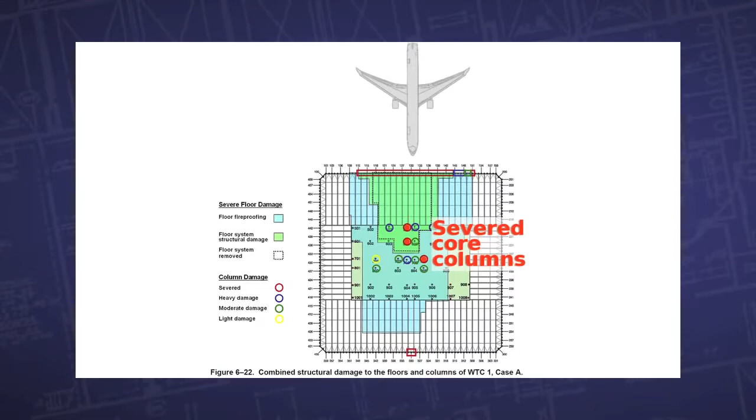Several columns were severed, and the jet fuel ignited fires that spread over several floors. About an hour later, millions watched in shock as both towers were suddenly and rapidly destroyed, killing almost 3,000 people, for whom truth and justice may have yet to be served.

Hi, I'm Richard Gage, AIA, licensed architect of over 20 years and member of the American Institute of Architects. I'm founder of Architects and Engineers for 9/11 Truth, a nonprofit organization of well over 1,000 technical and building professionals.

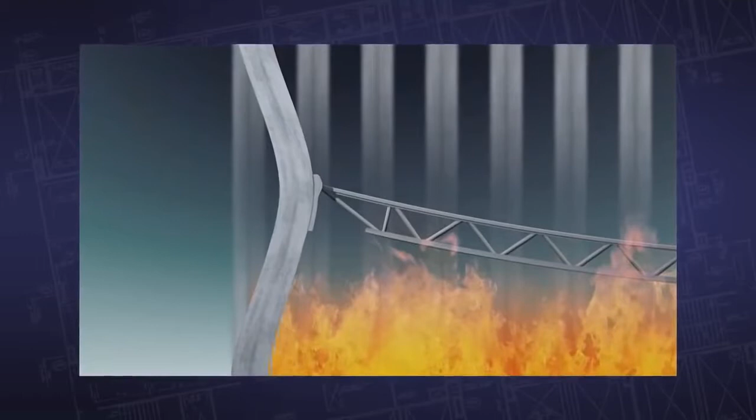According to official government reports, the fires weakened the structural steel framing of both twin towers, leading to sudden, progressive, and total collapses.

Unknown to most people, a third steel frame high-rise, World Trade Center 7, was also destroyed. Critical questions have been raised by more than 1,500 architects and engineers about the official explanations for the destruction of all 3 of these buildings.

Along with more than 10,000 other concerned individuals, these professionals, collectively comprising more than 25,000 years of experience, have signed our petition. They're calling for a new investigation into the destruction of these 3 World Trade Center high-rises.

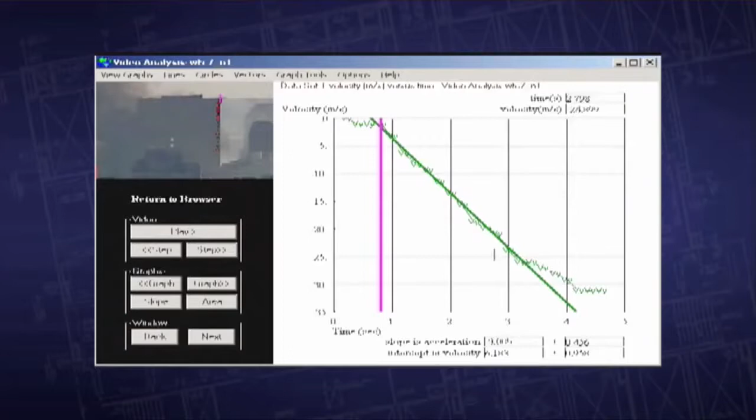This call is based on evidence that reveals a very different destruction scenario than reported by government engineers. As coherent sets of scientific facts are brought into focus by the experts, the data, and the witnesses in this film, you'll come to a much greater understanding of the events of 9/11 and will be in a position to draw your own informed conclusions.

The new World Trade Center Building 7 looms above the site of its original. Building 7 was a 47-story high-rise, not hit by an airplane. Yet it was the 3rd modern steel frame skyscraper to collapse rapidly and symmetrically on 9/11.

It was a football field away from the North Tower and sustained minor damage from falling debris. Building 7's precipitous collapse was blamed on normal office fires.

I'm Steve Barish, founder and president of Barish Architects and Associates, Inc., a 33-year-old architecture, planning, and engineering firm. One of the things that really interested me is how quickly the Tower 7 fell. It fell within 7 seconds approximately from top to bottom.

This building was built in the mid-'80s and met all the codes at the time. From about 1965 until about 1985, most of my experience has been in high-rise, multi-story steel buildings.

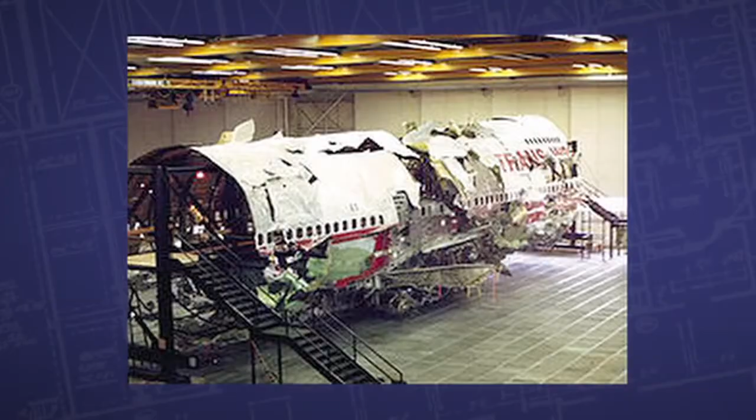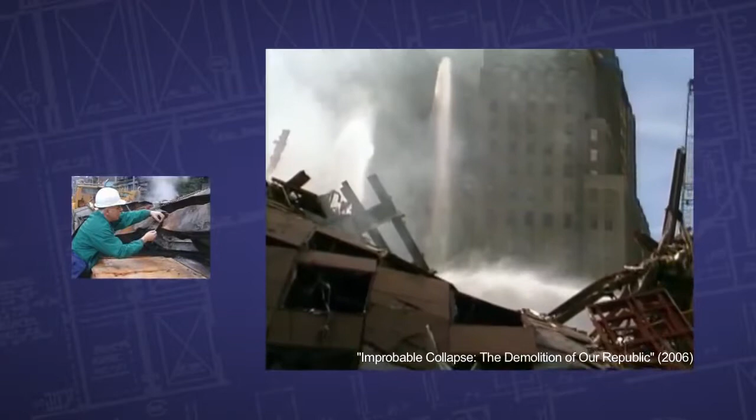Normally, when you have a structural failure, you carefully go through the debris field, looking at each item, photographing every beam as it collapsed and every column where it is in the ground, and you pick them up very carefully and you look at each element.

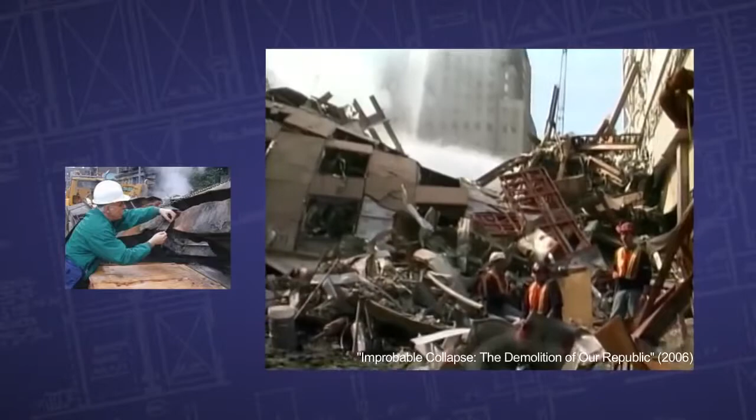We were unable to do that in the case of Tower 7. You can't do science when you are deprived of the evidence and when your hypothesis is the least valid instead of the most likely - when the most likely hypothesis in the case of Building 7 wasn't even mentioned. This is not science. It's trying to prove preconceived ideas.

Was a proper investigation performed that might have revealed the use of accelerants or explosives in World Trade Center 7's destruction? NIST concedes that they found no evidence for explosives. So then we asked them, well, did you look? And they said, no, we did not look for explosives or residues of explosives.

Big explosion. Blew us back into the 8th floor. I'm okay, all right? Here, hold on. You want to call your mother or something?

Just the fact that there were explosions means they need to be investigated.

Keep your eye on that building it'll be coming down. The building is about to blow up. Moving back. We are looking back. There's a building about to blow up.

We don't have the real story on what happened because there wasn't a proper investigation done.

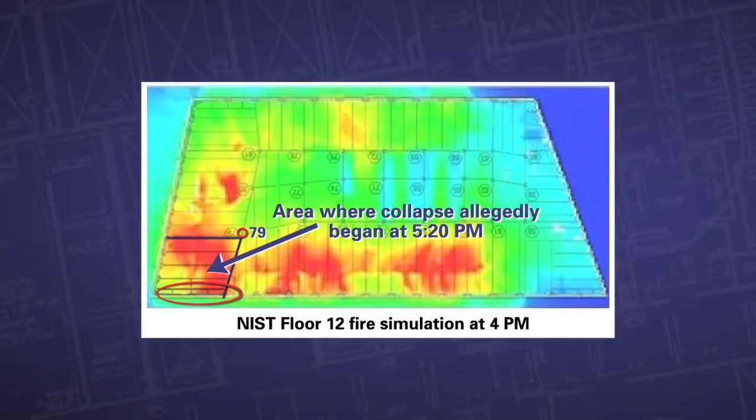This claims the fires were very large, very hot, and long-lasting, when in reality, observation, which has been researched by many people, shows these fires did not last very long. They were not in the locations where NIST claims they were at given times.

I'm a fellow of the American Institute of Architects. For the 40-plus years that I've been practicing architecture, I have designed a variety of buildings from small houses to high-rise office buildings. Some of the high-rises that I've worked on are 1 Shell and 2 Shell here in Houston. I was project manager for a 22-story office building in Akron, Ohio.

Later in the day, when World Trade Center 7 collapsed, they had already showed us pictures of a few fires in that building, and I mean, they weren't even raging. And how could that cause a building to collapse as if it were imploded? Couldn't happen.

According to lead investigator Shyam Sunder of the National Institute of Standards and Technology, NIST, World Trade Center 7 collapsed at freefall acceleration for more than 100 feet of its fall. What does the speed of the collapse reveal to us? Essentially, in less than 7 seconds, Tower 7 came down upon itself.

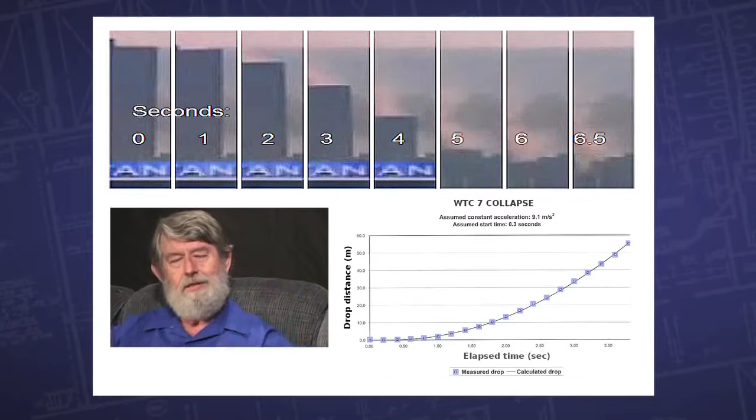It's just like taking your car keys out and just dropping them. That's how fast the building came down, for over 100 feet. And the only way you can get that is when there's zero resistance. So what we're looking at is a building just coming straight down, falling right through itself with zero resistance.

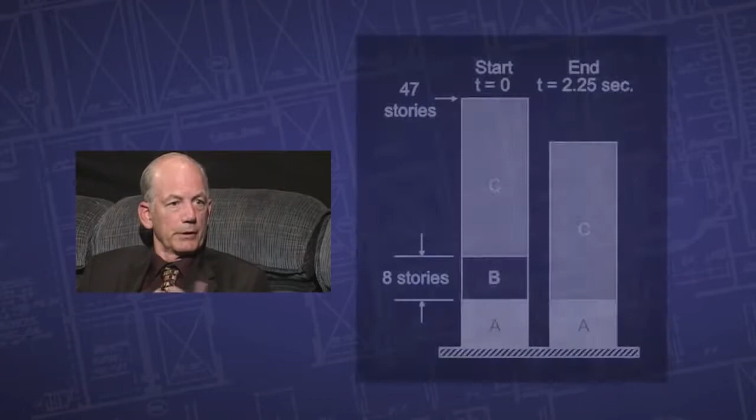Buildings don't have zero resistance, which is why you feel comfortable walking into a building. This building had 40,000 tons of structural steel in its structural system, and that is intended to keep it from going anywhere. NIST is telling us that the building below it ceased to exist for the first few seconds of the collapse of the building.

Well, things in physics just don't cease to exist and cease to resist the forces that are on them. The building didn't disappear, so the building can't fall for 100 feet at free fall speed. That's impossible. That's a violation of the fundamental law of physics that says that for every action there's an equal and opposite reaction.

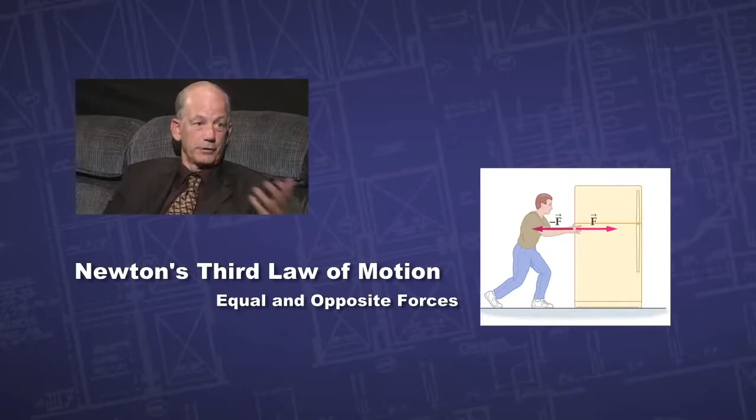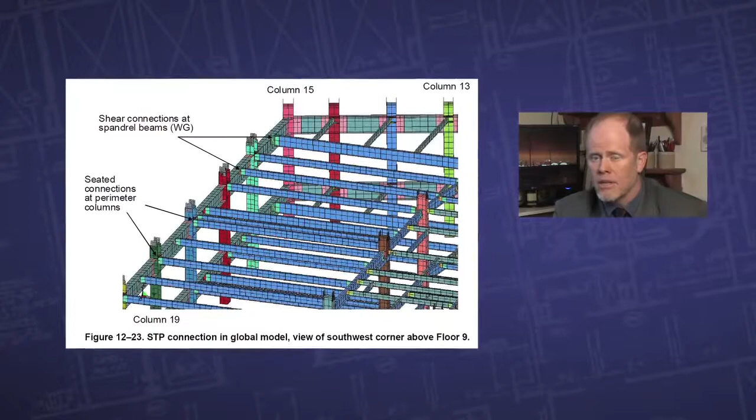If floors fall, they tend to fall and are braced by the floor directly beneath it. And there's some delay there, because of redundancy, because of all the other columns in the building that were not affected. Even if a floor were to collapse, it still wouldn't be able to collapse all of the connections simultaneously at the rate that it did without secondary explosions.

We might anticipate that an unevenly damaged building would fall over. Yet, videos of the collapse of Building 7 show a fairly symmetrical fall. How do we make sense of this?

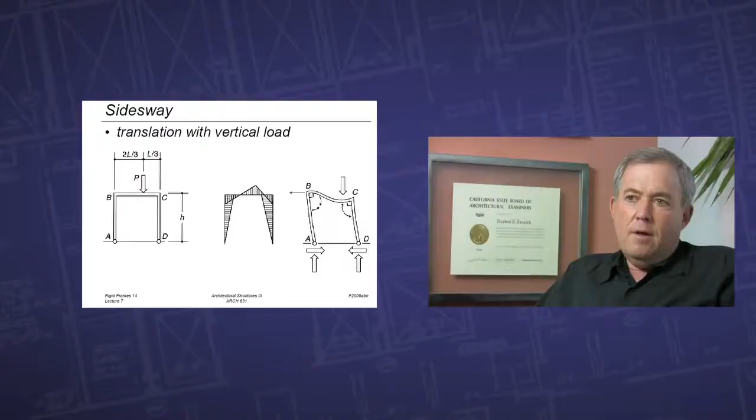If the buildings had come down by fire, we would have seen a more natural progression of collapse, and clearly a more asymmetrical pattern should have been present.

The symmetry is the smoking gun. It cannot happen that when you have asymmetric damage, you will get a perfectly symmetrical collapse. The exterior columns on the outside as well as on the inside at the bottom would have to be severed almost at the same time.

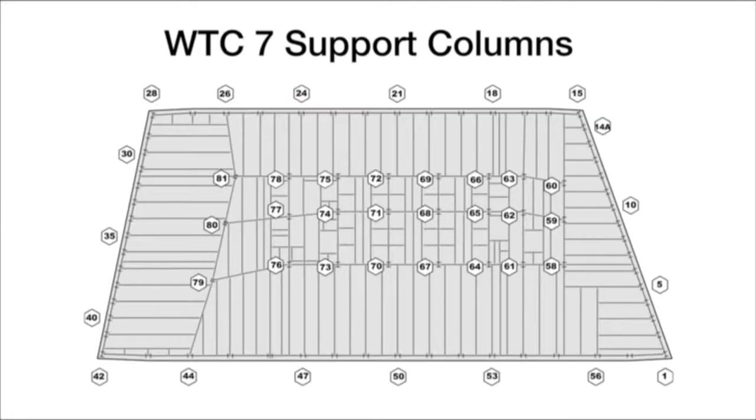I worked for Controlled Demolition Incorporated, CDI, the top-rated explosive demolition firm in the world. What I saw, it was a classic implosion.

The center of the core, the penthouse area, starts to move first, and then the building follows along with it. That's another indicator that this NIST report is very suspect. When it's all finished, the outside walls are piled one on top of the other right in the middle of the building, just like a house of cards coming down.

According to NIST, the failure occurred at column 79 on level 13. This means basically they're talking about a single columnar collapse or failure that resulted in a total collapse of the building. That just does not make any sense.

The explanations from FEMA and from NIST don't add up. But there is enormous circumstantial evidence, circumstantial and actually physical evidence as well, that would lead us to a different conclusion. And the conclusion is controlled demolition.

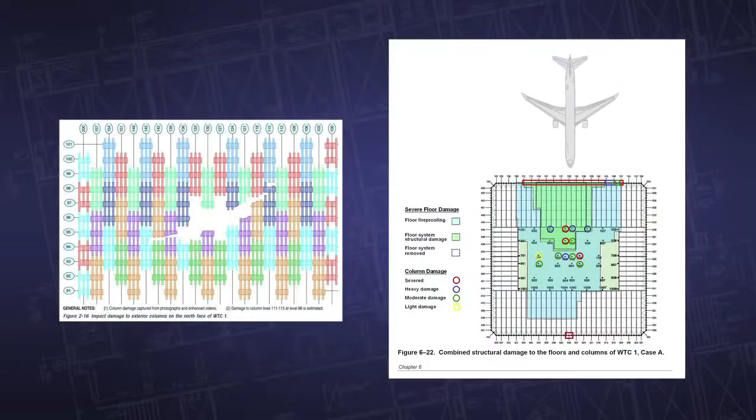Just 10 years ago, the planes hit the towers, cutting through some exterior and interior supporting structural steel columns. The fuel from the planes ignited office fires across several floors. According to the official reports, the structural steel frame was weakened and failed, causing a total progressive collapse of each tower. Does the official explanation make sense?

Was there a comprehensive investigation that examined all of the evidence?

I walked into the office and the first words that I heard was, 'A plane's just run into the World Trade Center.' And my initial thought was, well, that's okay. It's built to withstand a 707.

It did not seem possible that these towers, which were designed to withstand the impact of a 707, could possibly collapse in such a short order of time from the time that they were hit.

The majority of the jet fuel was burnt up instantly in the big fireball, and it was gone. The fires that were left were office furnishings, carpet, and things like that.

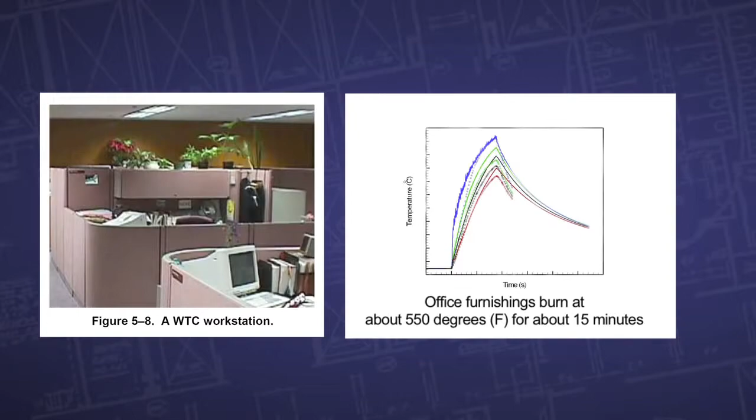A lot of things in these kind of buildings have to be fire resistant by nature. It's required by code. So there really isn't a whole lot of fuel in there to begin with.

The media portrayed these fires as being extremely hot, but the fires were not that hot in World Trade Center 1 and 2. If you look at the NIST's own data, you could see this.

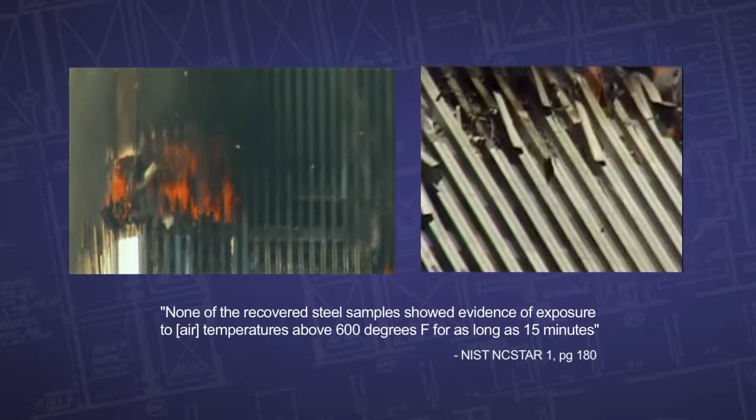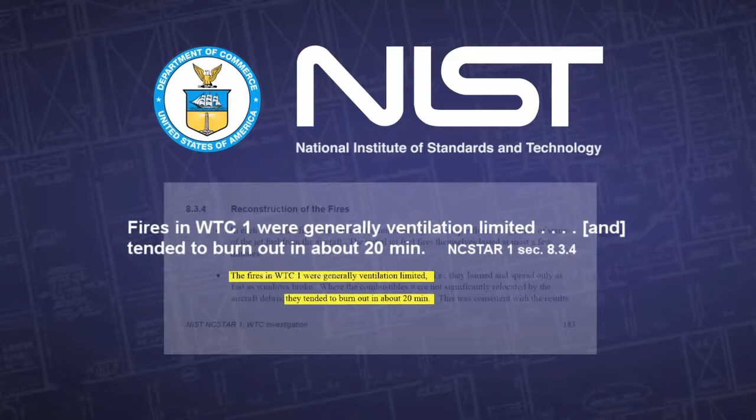And to use our own powers of observation, you could tell by seeing these fires and seeing black smoke come out the windows. That means the fires were oxygen starved, and it was incomplete combustion. And so it was a low temperature fire.

The heat from the fire supposedly softened the steel and thereby brought the buildings down. But if you have a flame at 750 degrees, you can hold that flame under a steel beam forever, and you'll never reach a high enough temperature to bend steel, let alone melt it.

So immediately I knew at that point that the official explanation was dead wrong.

Rather than a slow groaning collapse that we might anticipate, the Twin Towers show in the videos a very rapid, sudden onset of destruction. What does this imply?

NIST claimed that the upper section of each of the towers crushed the lower section. However, when you watch the video closely, in the case of World Trade Center 1, you'll see that the upper section disintegrates itself. It appears to be a controlled demolition of its own of the upper section.

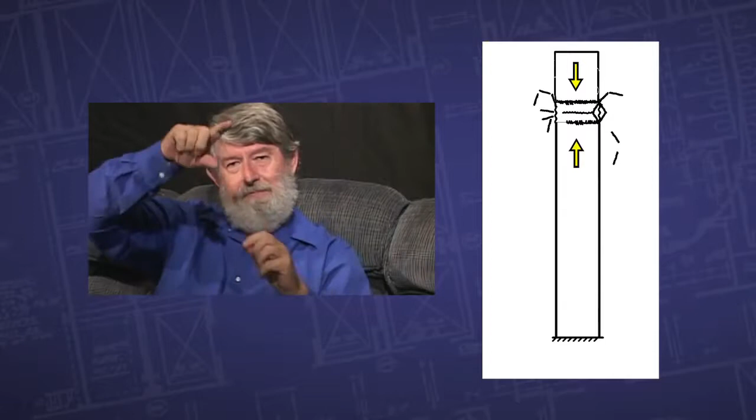The top section, pushing on the bottom section, is going to meet equal forces as it goes. Both sections are going to be demolished at the same rate. So by the time you've crushed up 15 stories below it, the top 15 stories are also going to be crushed. And so there's nothing left now to crush the rest of the building.

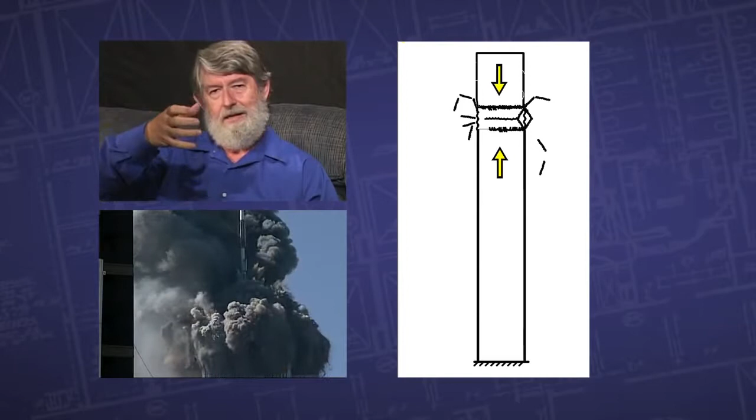You're looking for a jolt. If this thing actually comes down and hits, you should be able to see the point at which they actually impact, because it would actually slow down the motion of the falling block.

Before the tower started collapsing from the top, the antennas started to fall. And the antenna, of course, was over the middle of the elevator shafts.

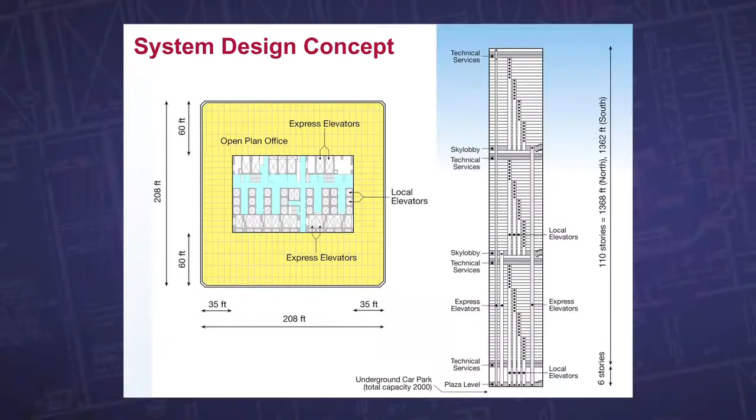I'm very familiar with the interior structure that surrounded the elevator shafts and the accessibility which the elevator companies had 24/7. It wouldn't be a problem once you gained access to the elevator shafts.

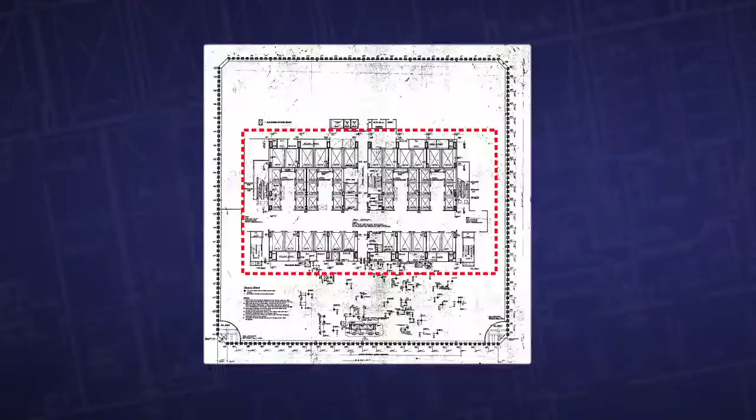Then a team of loading experts would have access to all the core columns and beams. The rest could be accomplished at that point by just the right kind of explosives for the job at hand. The only way that I can see that the towers could have collapsed is that the interior columns were compromised.

Over 100 first responders reported sounds of explosions and flashes of light at the onset of destruction of both towers. These were not discussed in the NIST report. What did these eyewitnesses actually see and hear?

As we were getting our gear on and making our way to the stairway, there was a heavy-duty explosion inside the lobby. We stuck on the stairs for a while. We finally got down to the lobby. Then we got to the lobby, it was this big explosion.

There were numerous secondary explosions taking place in that building. There were continuous explosions. Floor by floor, it started popping out. It was as if they had detonated it, as if it were planned to take down a building.

Boom, boom, boom, boom, boom, boom, boom. And it just started going pop, boom, boom, boom, boom, boom. And he goes, how fast? I go, like firecrackers. They're reporting exactly what I would expect - you're hearing boom, boom, boom, boom, boom, waves of explosions going off, not one massive big boom.

There are so many videos of witnesses from that day that report explosions. There's radio transmissions from the FDNY. We have the transcripts recorded back in 2001 of all these firefighters and first responders reporting explosions. This testimony should have caused the presumption that there was a good chance explosive residue would be found, and justified testing for it, rather than the opposite.

First of all, let's go back to your basic premise that there was a pool of molten steel. I know of absolutely nobody, and no eyewitness who said so, nobody who's produced it.

You'd get down below and you'd see molten steel running down the channel rails, like you're in a foundry. Yeah, like lava, like it was lava from a volcano. Actually melted beams, where it was molten steel that was being dug out. Underground, it was still so hot that molten metal dripped down the sides of a wall. It's this fused element of steel, molten steel and concrete, and all of these things all fused by the heat into one single element. And they pulled off a big block of concrete, and there was like a little river of steel flowing.

Many witnesses, firemen, and lots of people described flowing molten metal, iron or steel, at extremely hot temperatures. And John Gross categorically denied their observations. Because their observations don't fit his preconceived notion, he not only ignored evidence, he denied evidence.

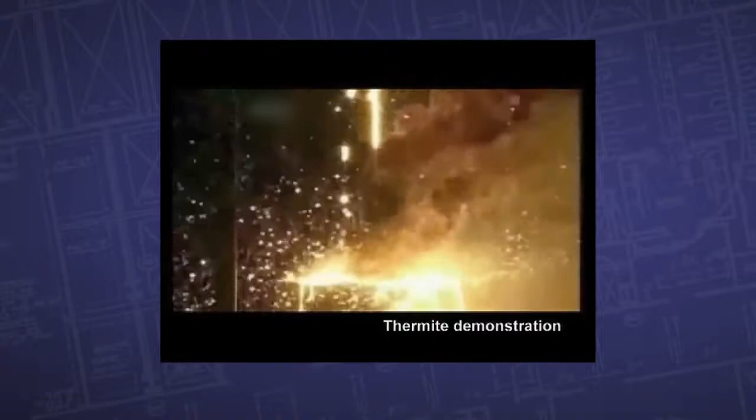It's direct evidence for the use of thermite. An incendiary used by the military, thermite is a compound of iron oxide and aluminum, which when ignited sustains an extreme heat reaction, creating molten iron. In just 2 seconds, thermite can reach temperatures over 4,500 degrees Fahrenheit, quite enough to liquefy steel.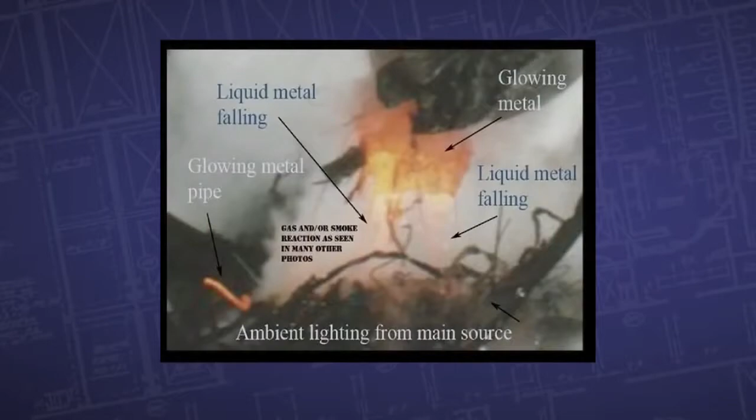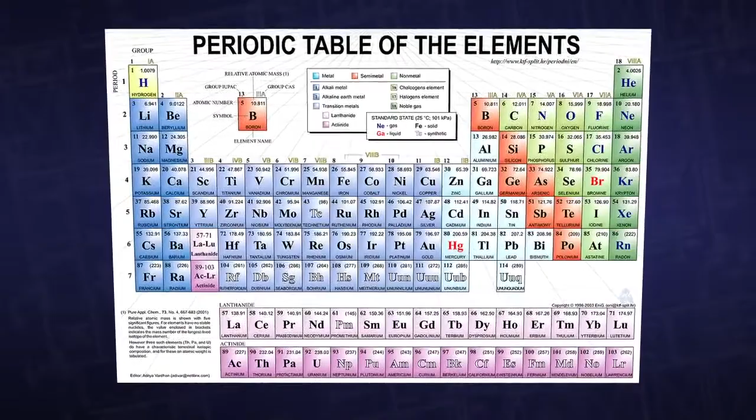We know that open-air fires cannot burn hot enough to melt steel, but metal had melted at the base of the towers. I found a pore in the steel that had pure sulfur. There's a government theory that calcium sulfate from gypsum boards was the source of sulfur, and that's wrong. Calcium sulfate cannot undergo any kind of chemical reaction that produces the element sulfur, and we're not dealing with any kind of compound of sulfur. When we're talking about sulfidation, we're dealing with the element sulfur.

There's a version of thermite called thermate, which has sulfur in it. What the sulfur does is it's sort of like salt on ice — it basically makes the steel melt at a lower temperature.

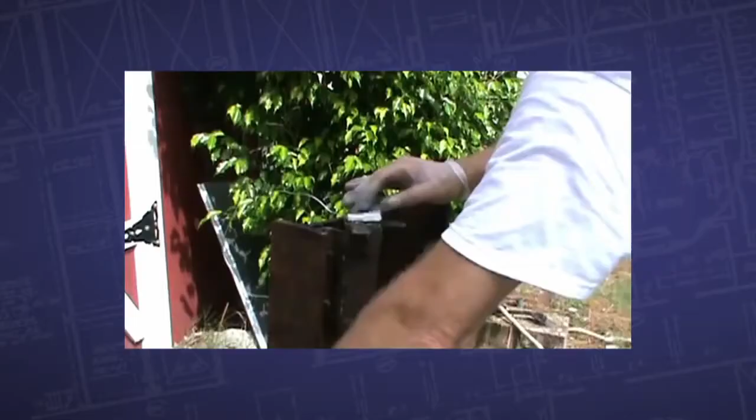If you search Google for thermite and building demolition, you can find devices that have been fabricated and invented that use thermite for building demolitions. In the case of thermite cutting charges, you would have heard far less noise since they work by thermal heating, melting the steel, rather than explosive cutting as in RDX charges.

Overflights had detected, with infrared camera, 1400 degree Fahrenheit hotspots on the surface of ground zero. That being there for a week indicates that there was something very hot going on below the surface. So thermite would also explain potentially the fact that the fires could not be put out at ground zero.

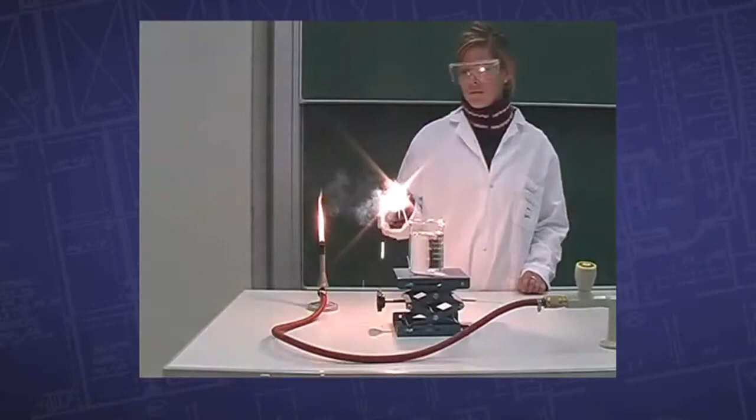The fires lasted for quite a while, but most importantly, they were deep within the pile, where people would expect the environment was oxygen starved. Thermite could explain this because it has its own oxidant within — it's actually the metallic oxide that provides the oxidant to allow the incendiary thermite reaction to occur, even underwater.

As much as 6% of the World Trade Center dust consisted of tiny, previously molten iron spheres. What does this tell us about the temperatures generated in the tower's destruction?

When the USGS collected samples of the World Trade Center dust, they found the iron microspheres. Insofar, the USGS does not have a valid explanation for the presence of these iron microspheres. So what do the microspheres contain?

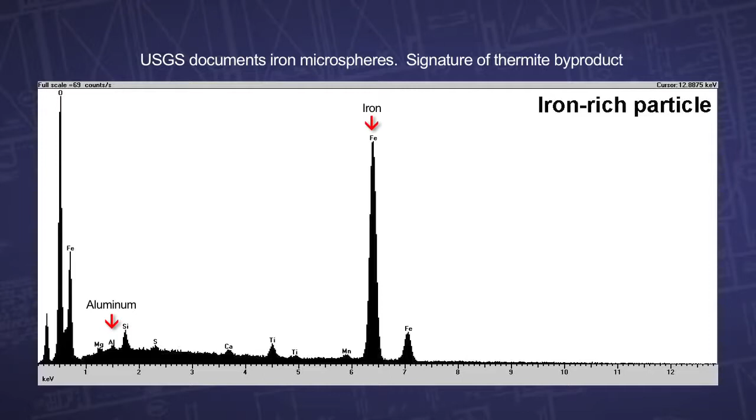Iron is the main element, with smaller portions of aluminum, sulfur, and a trace of manganese. Most of them are less than about 1/10 of a millimeter in diameter, and they're spherical. They're found in all of the dust blown out of the buildings during collapse, no matter where in Manhattan that dust is picked up.

You must have had a much hotter heat source for you to get 2,700 degrees Fahrenheit in order to melt the iron to get these molten spheres. Your heat source must be something like an exothermic chemical reaction — in the case of thermite, reacting at 4,500 degrees Fahrenheit.

My contention, based on finding thermite residue in the dust, is that it happened before — it didn't happen after, in the fires that ensued in the rubble pile afterwards. All the characteristics of the microspheres, along with what I see in the attack on the beams that were actually found, tell me that thermite was involved in melting those steel beams.

Out of the ashes of the World Trade Center devastation rises the Freedom Tower, whose foundation, however, is shrouded in question. For example, in the World Trade Center dust, an international team of scientists found an advanced form of highly energetic nanothermite composites. What is it, and where does it come from?

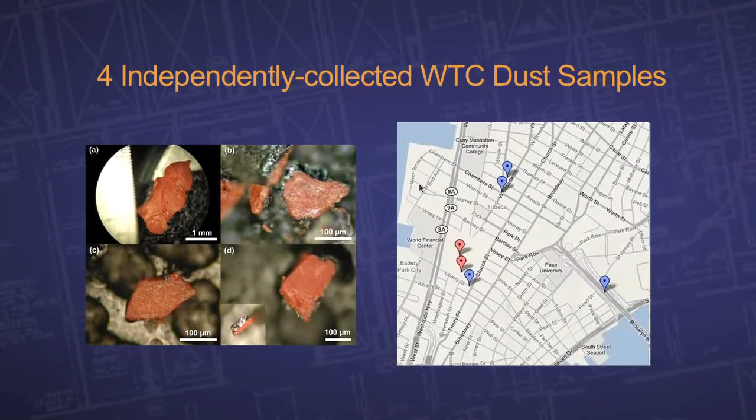In the dust, we found what we characterize as unreacted thermitic material, in the shape of some very tiny red-gray chips. In the reaction, they produce molten iron, which is the prime indication of a thermitic reaction. And such a reaction can be used to destroy steel structures.

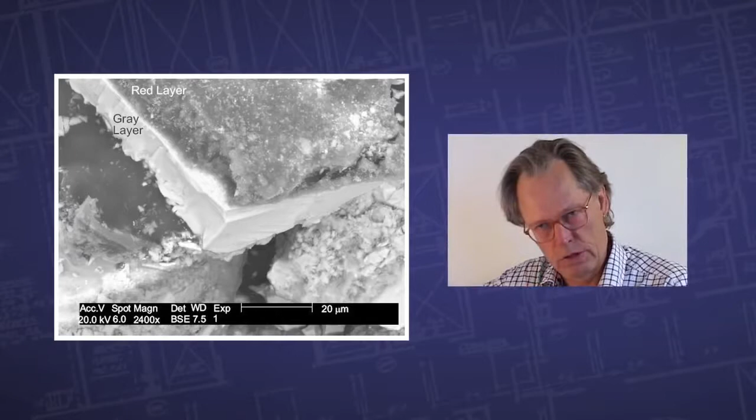What we have found is a modern version of thermite, which we call nanothermite, produced in a different way. It is not just two powders being mixed — the material is actually built from the atom scale up. We call it the bottom-up procedure, which is what you do in nanotechnology. The ingredients are much smaller, which means they're reacting faster and they are more easily ignited.

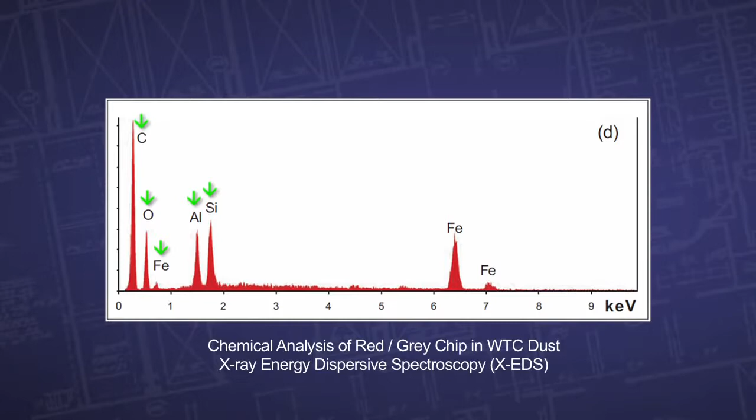The primary elements in the red material are aluminum, iron oxide, as well as silicon and carbon. The iron oxide appears in faceted grains, approximately 100 nanometers across. The aluminum appears in thin platelets, about 40 nanometers thick.

This is discussed in our paper in the Open Chemical Physics Journal, published in April of 2009. But so far, none of these papers have been refuted in the literature, the scientific literature. So that means they are unchallenged in the scientific sense. They stand as an indictment, really, of the official story of 9/11.

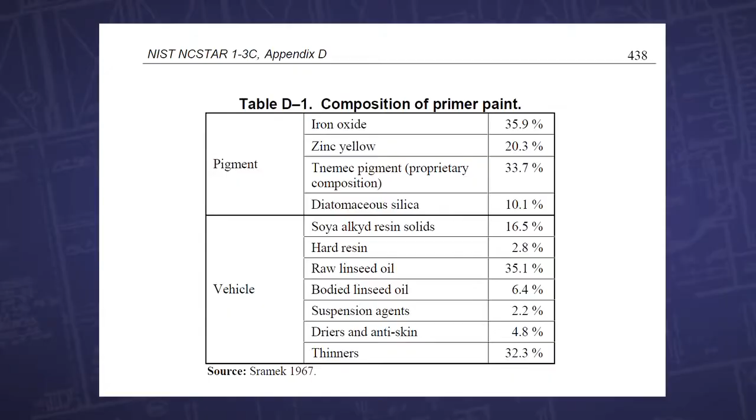We also took paint that came off of the WTC steel and looked at that in the SEM and did a compositional analysis, and found that it was not similar to the red-gray chip or the red layer of the red-gray chips. This cannot be paint. Paint does not have these exotic properties. It's impossible. This is material that is of military use that really shouldn't be there.

You don't need to be an engineer or an architect to see what happened to those buildings.

Any honest investigator would be looking at this and looking for explosives and so forth. The NIST investigation didn't go there. They just would not look for explosives. This has been the work of independent researchers, not NIST. So the preconceived notion of NIST is that there's no evidence for explosives, and so there's no point in looking. That is the most unscientific thing that you can possibly think of, not to look because you don't expect to find evidence, and in fact the evidence is overwhelming that these red-gray chips are very high-temperature incendiaries. They state these conclusions for which there's virtually no evidence, and then they ignore conclusions that can be drawn from the evidence.

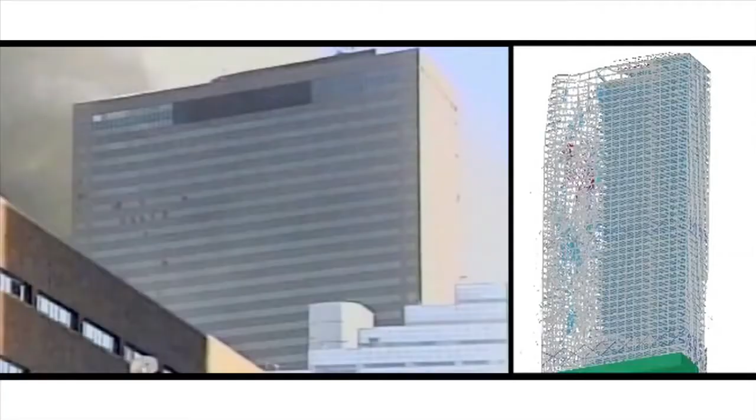And what some of us will tend to do is deny the evidence that's coming our way and stick to the original story, the official story, and try to regain our equilibrium in that way. Another thing we can do is decide to look at the conflicting evidence and be sincere and open-minded, look at both sides of the issue and then make up our own mind about what reality is.

Someone would have talked. But these are beliefs. They are not scientific facts. But these beliefs do keep us from looking at the empirical evidence. Whenever we say, I refuse to believe, we can be sure that the evidence that's coming our way is not bearable and that it's conflicting with our worldview much too much.

As I thought about all of these responses, I realized that what is common to every one of them is the emotion of fear. People are afraid of being ostracized, they're afraid of being alienated, they're afraid of being shunned, they're afraid of their lives being inconvenienced, they'd have to change their lives, they're afraid of being confused, they're afraid of psychological deterioration, they're afraid of feeling helpless and vulnerable. And they're afraid that they won't be able to handle the feelings that are coming up. None of us want to feel helpless and vulnerable.